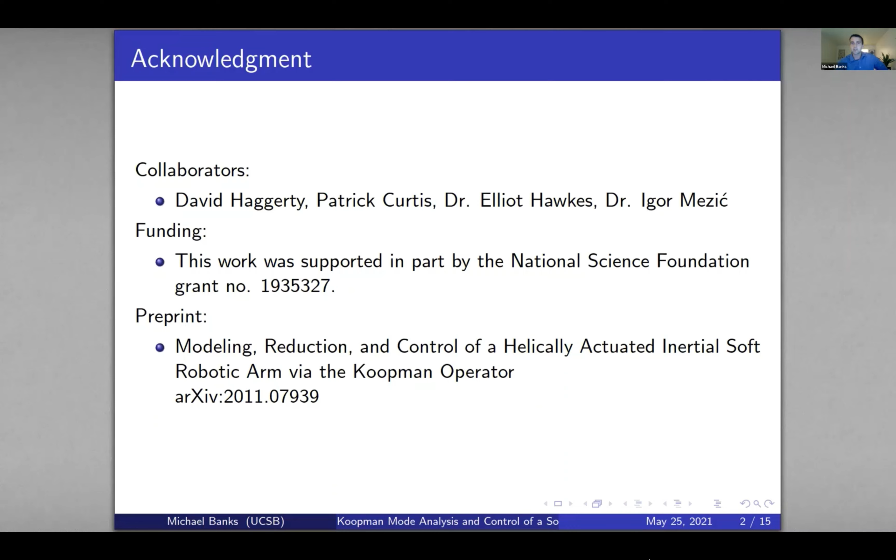The challenges, though, are in the modeling and the control. This is a nonlinear system, and it's effectively infinite dimensional because you need to keep track of the location of the robot all the way along that continuum. And then also the governing equations are unknown to begin with.

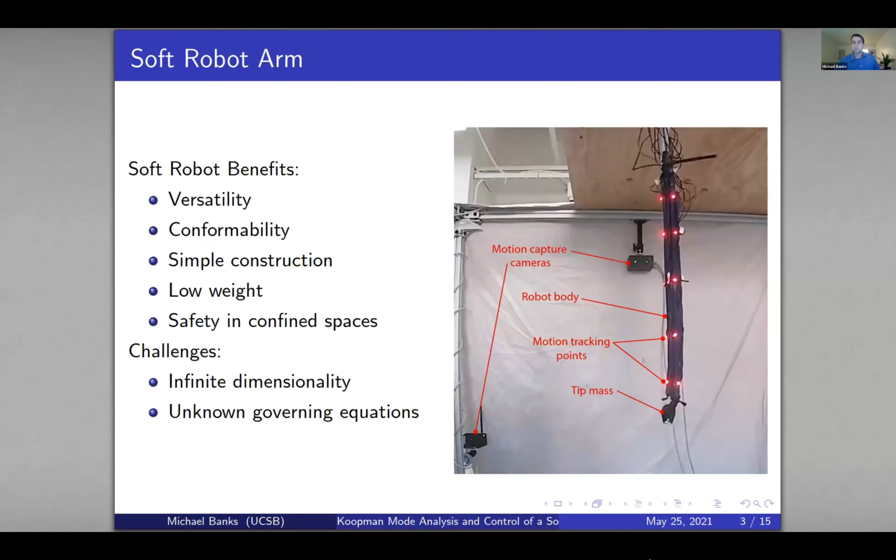So this is the movement that our robot is capable of achieving. Existing soft robot arms emphasize high precision, and they do some amazing things with picking up objects or pointing and that type of thing. But we wanted to focus on high deflection, very much nonlinear and fast and aggressive movement.

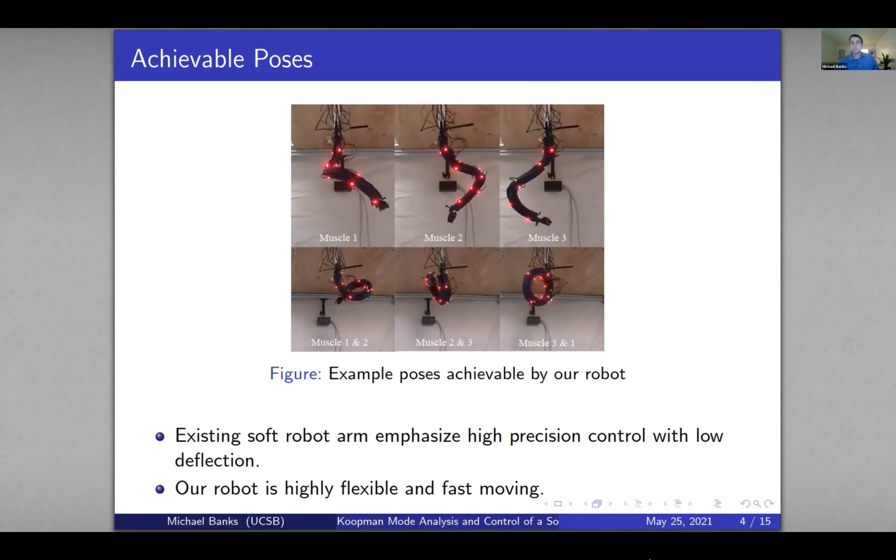A soft robot system is inherently nonlinear, especially when we move into this large deflection regime. Even worse, the dynamics are unknown, and it would be kind of a nightmare to try and analytically derive the governing equations here. You'd have to measure all sorts of complicated interactions between the materials and so on.

So really the natural thing to do is to move on to data-driven methods. And in particular, we favor the Koopman operator-based methods because you really are able to genuinely model some of the nonlinearities in the system. And also, it's highly interpretable. You get all this interesting spectral structure out of it that I'll talk about.

So we do have to pay the price of high dimensionality, though. You multiply the number of observables you start with to many, many more, but hopefully you can span some type of subspace, and as you add more observables, you get a better model, and I'll talk about that a little bit more.

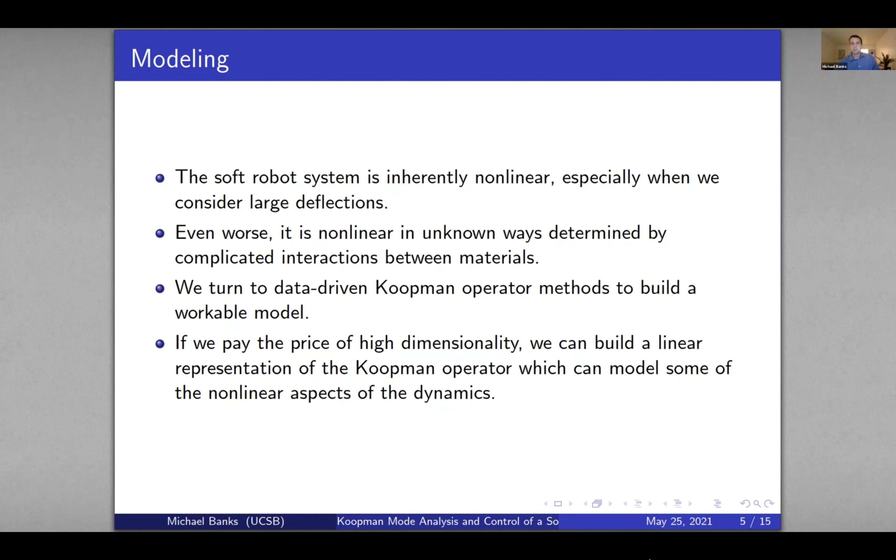So start with some arbitrary dynamical system of this form. We're working in discrete time, so you have T, some type of nonlinear transition function, acting on your state. It gives you your shifted state, x plus, and the states live on the state space, M. And so that's the typical model of a dynamical system.

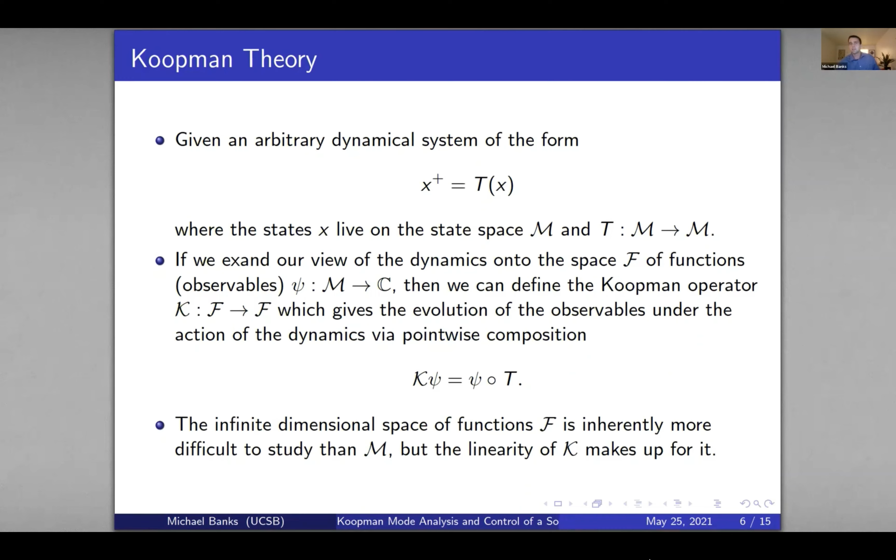We want to expand our view of the dynamics onto the space of functions, which we call observables, psi. We can define the Koopman operator, K, acting between the space of functions, which gives an evolution of the observables under the dynamics via pointwise composition. So you've moved from a finite dimensional state space to an infinite dimensional function space, but actually you can prove that the Koopman operator is linear no matter how nonlinear your original dynamical system was.

So you can't store an infinite dimensional anything on a computer, really.

So we want to be able to build a finite dimensional linear approximation of the Koopman operator. There are existing algorithms. The one we choose is dynamic mode decomposition, in particular a few twists on the original DMD. But first, what you have to do is choose a finite set of observables.

What you really want is for these observables that you choose to span some invariant subspace of the Koopman operator. And if you can do that, you can essentially model that entire subspace of the Koopman operator. But in principle, those are usually pretty difficult to choose.

So first, what we do is we're collecting the XYZ locations of those 15 red motion tracking points you saw in the picture of our robot. They're located down the length of the robot. And then for each of those measurements, we take 10 time delays of the measurements.

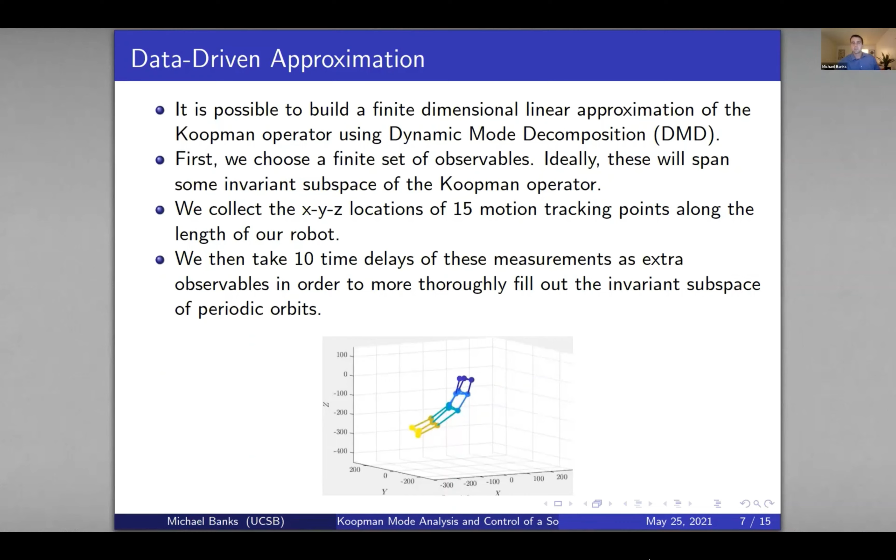What happens is, as you fill your observables with time delays, there are some theorems that you can prove that show that this does a pretty good job of filling out the invariant subspaces for periodic systems, which is a good enough heuristic for us here.

So this, when you use time delays in DMD, it's called Hankel-DMD. Really what we're doing is Hankel-DMD subscript C with control. We're going to get a B matrix, an input matrix out of this as well.

But first thing we do is we start with 2 matrices of data snapshots. X would be the unshifted data. Y would be the shifted measurements corresponding to the original unshifted measurements, as well as a matrix of inputs. There are M of these measurements, which are the commanded pressures in those 3 lengthwise muscles.

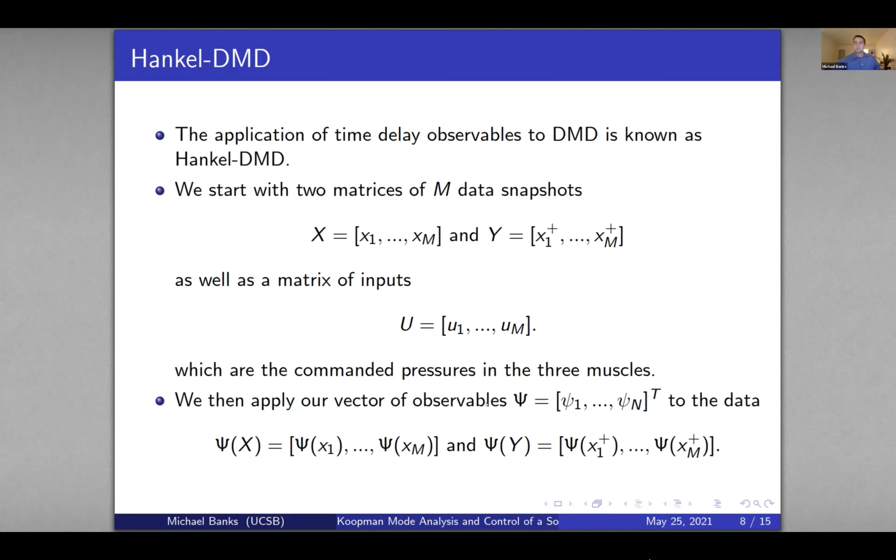We apply our vector of observables to the data. So this, again, expands the dimensionality of our data. And we formulate the following problem.

So really we desire matrices A and B such that we get this nice linear model here. This inspires the following minimization problem, which is really just Frobenius norm minimization of the predictions minus A times the originals and B times the inputs.

And the solution to this is given by the Moore-Penrose pseudo-inverse down here, and you can pull apart A and B as you need them. Really this is the foundation of the algorithm, so it's pretty simple. It is just Moore-Penrose pseudo-inverse. And then A and B together approximate part of the Koopman operator, actually.

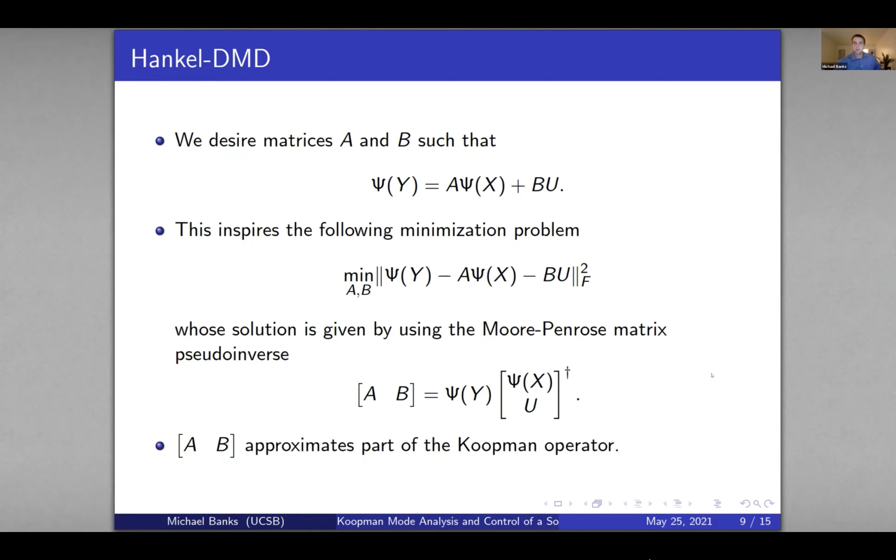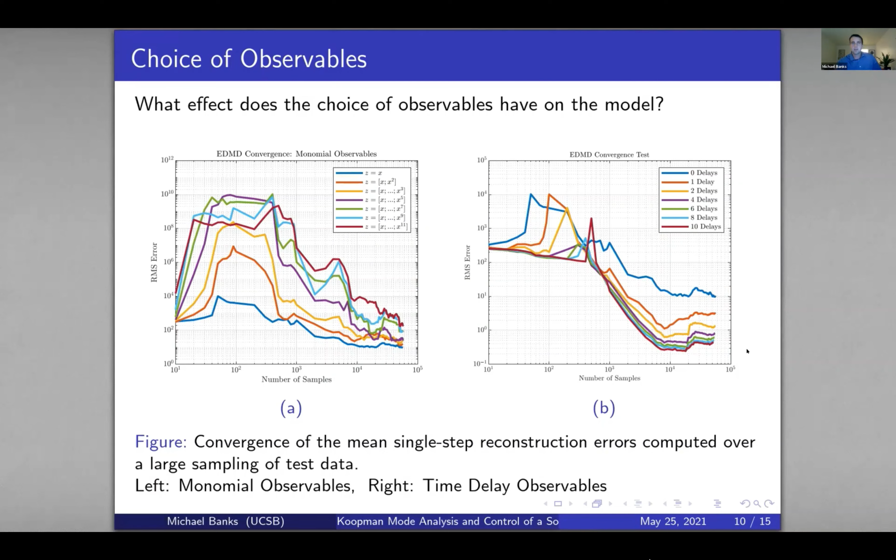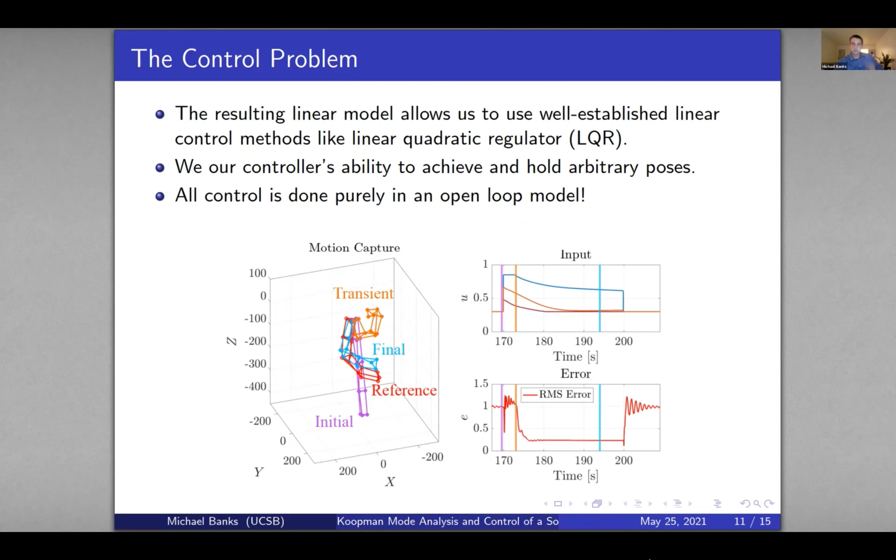I have a video that demonstrates this, so you can actually see it in action. One thing I want to point out is that all of our control so far is done completely in open loop over this long time horizon. As we transition to a closed loop model, we think this will be even better.

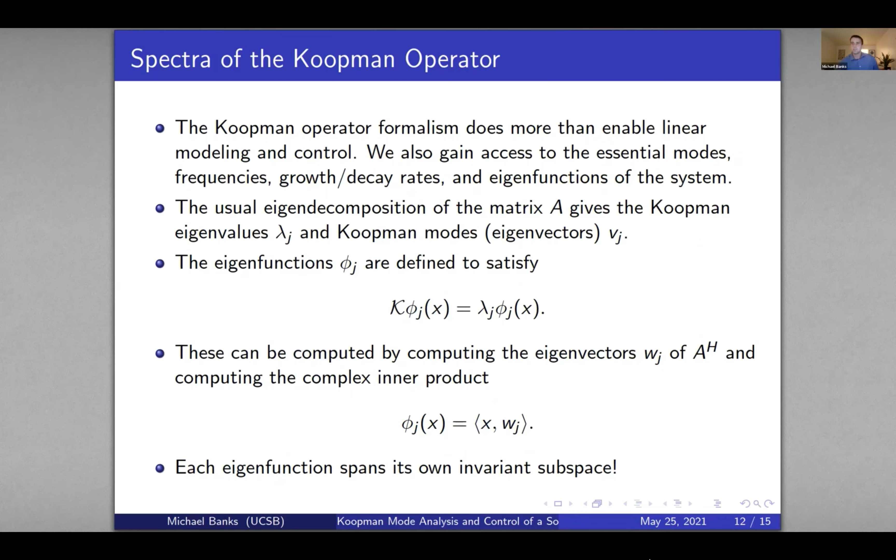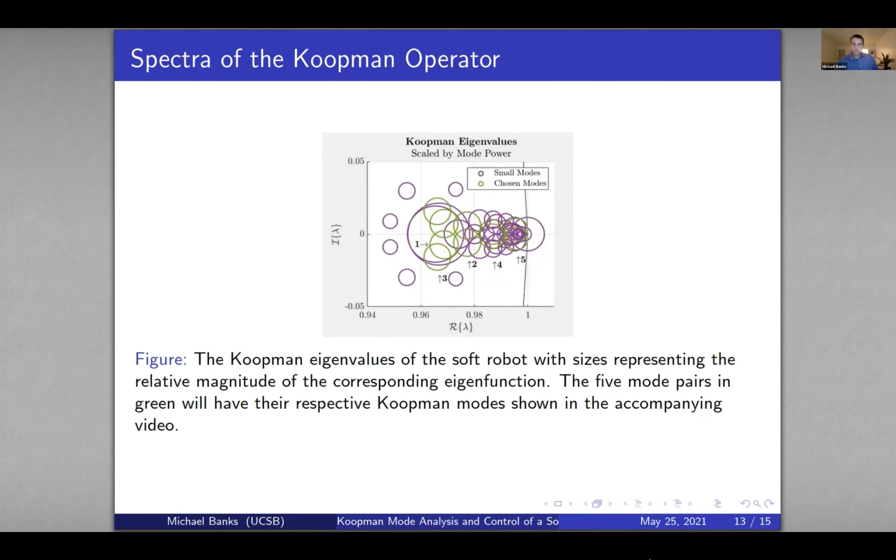I'm going to show right now. Yep, so title slide.

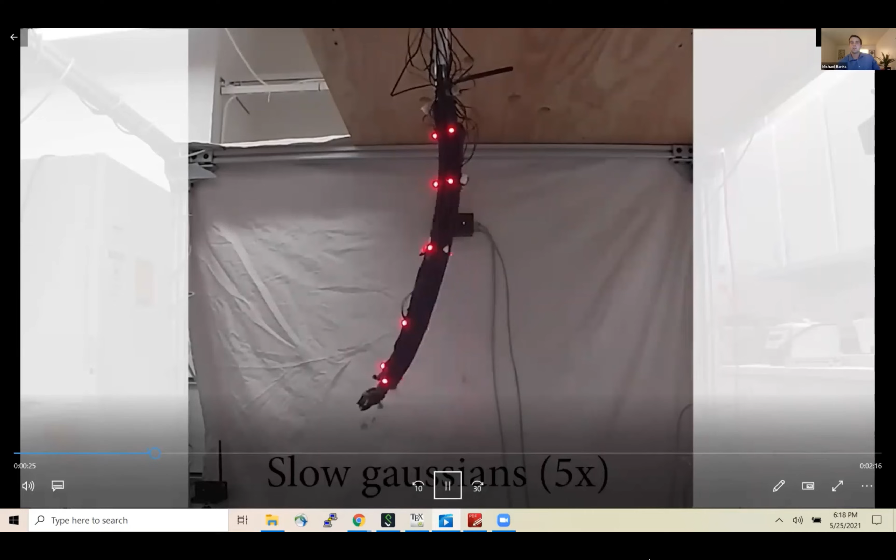Okay, here's our robot in action. First of all, you want lots of basically random training data, right? You want to expose your robot to as many possible states and configurations as possible. So this is us running through kind of the almost quasi-static type of dynamics of the robot.

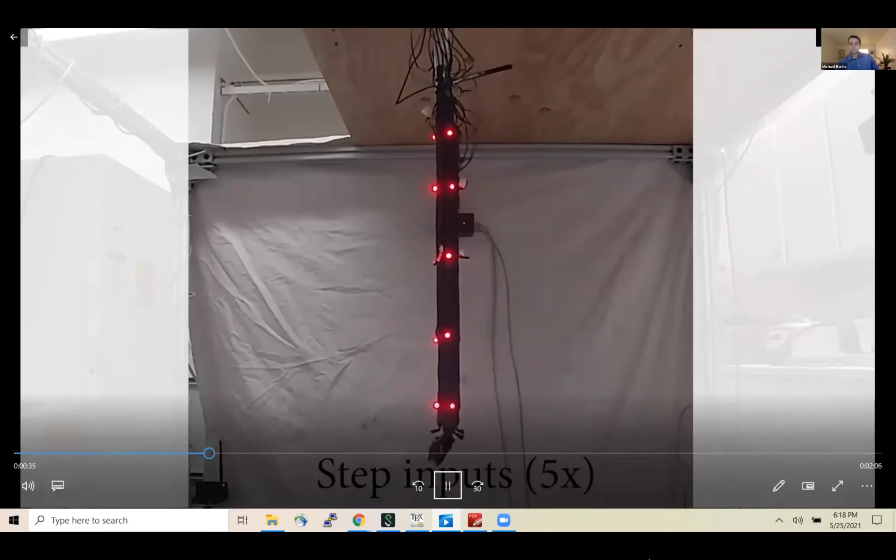Now we move on to the much more aggressive stuff. When we apply step inputs to the robot, we have very aggressive transient dynamics as well as settling dynamics onto some new equilibrium position.

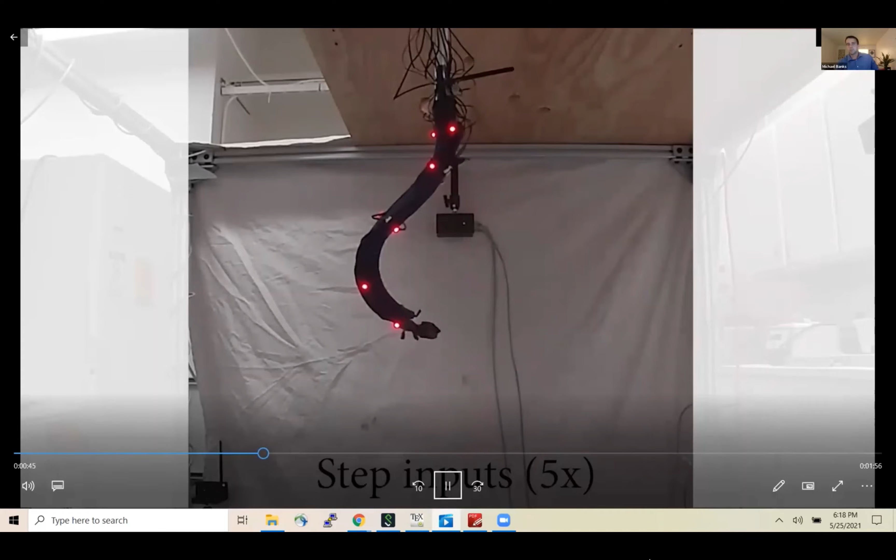So these are the two types of training we used to build our model, and all of this data is collected. I think it's at least a half an hour total of data.

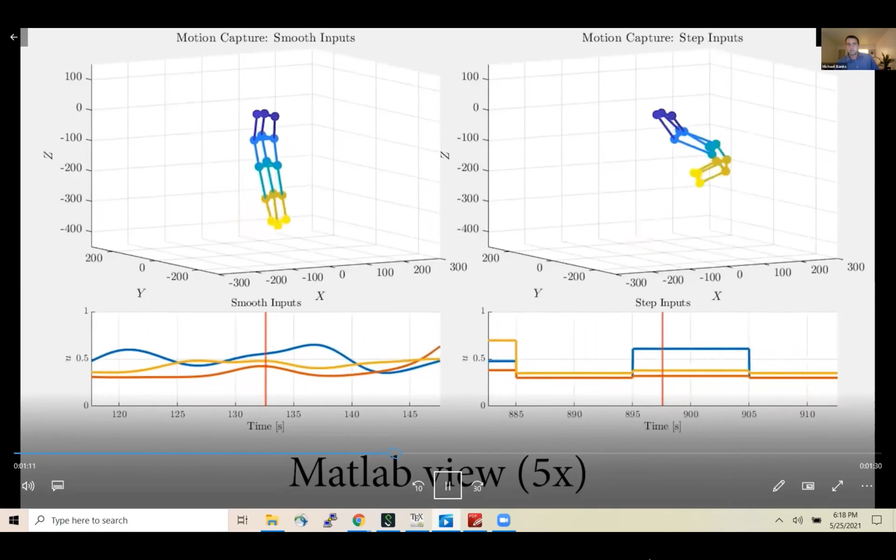On the top two plots, you can see what the actual motion capture points look like. The bottom two plots here are the pressures in those three muscles.

Okay, what do the modes actually look like? I might want to stop it here. On the upper left, this is that eigenvalue plot I showed. Then we have these three pairs of modes. So mode pair 1 here is shown here.

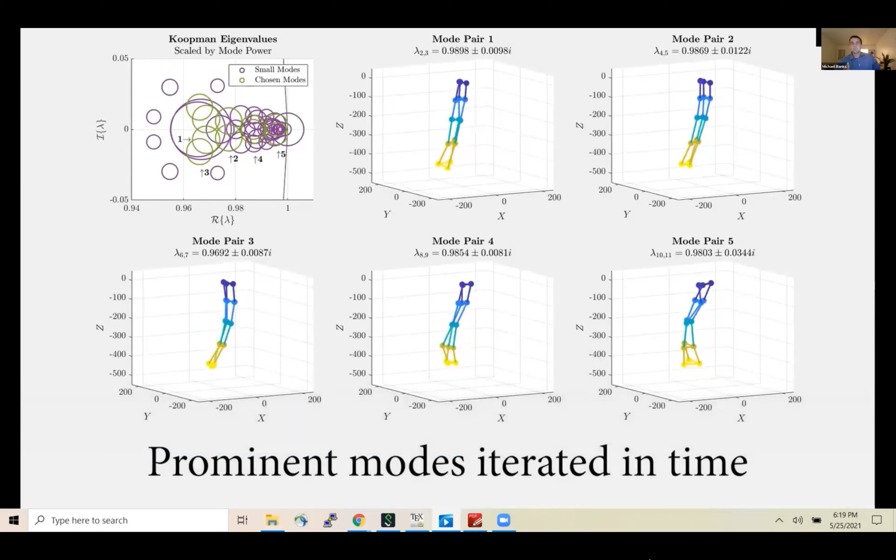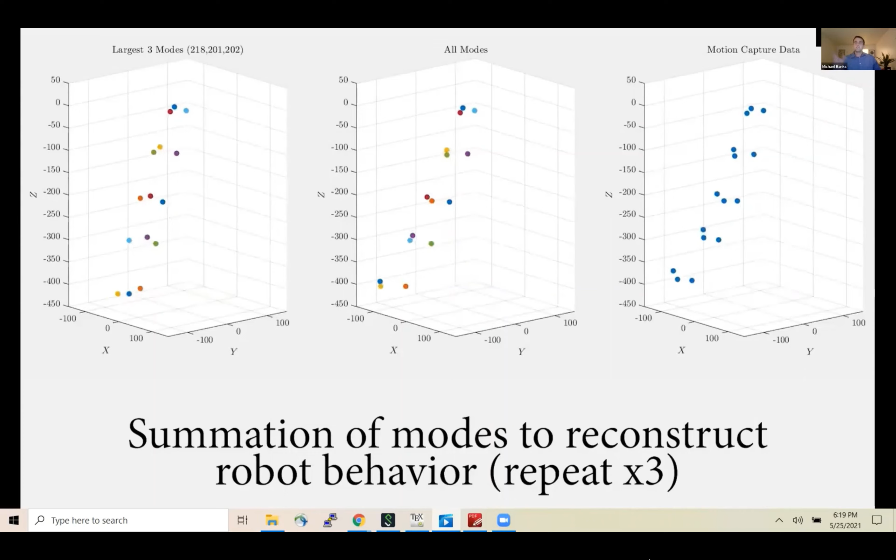One minute left, I'll just let these play. You can start to look through the different modes of your system and pick out physics, right? So for example, on the left, these are the three largest modes, which correspond to the time average plus 2 complex conjugate modes, which give you this simple oscillation.

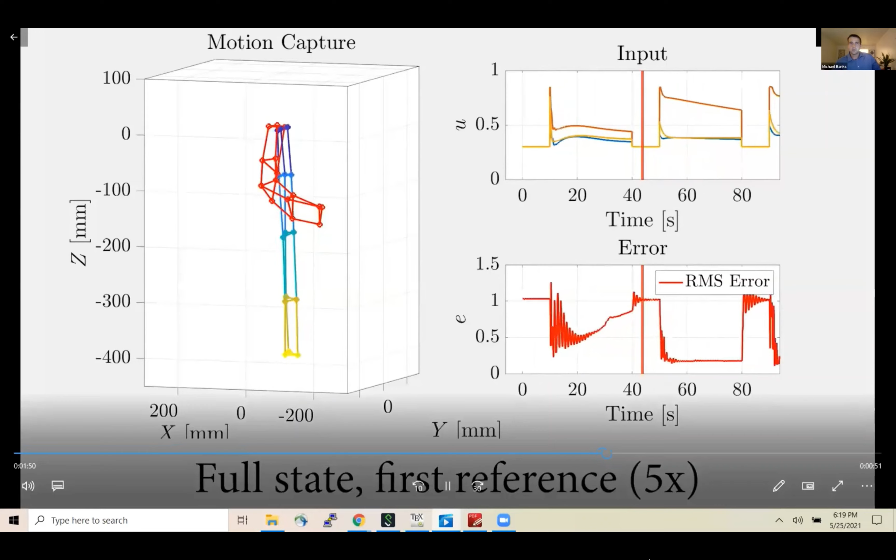And then I need to show the actual control. So with way too few modes, you get poor agreement, and then with enough modes, you get good agreement. The rest of this video is just a demonstration of a bunch of control positions that we are able to achieve.